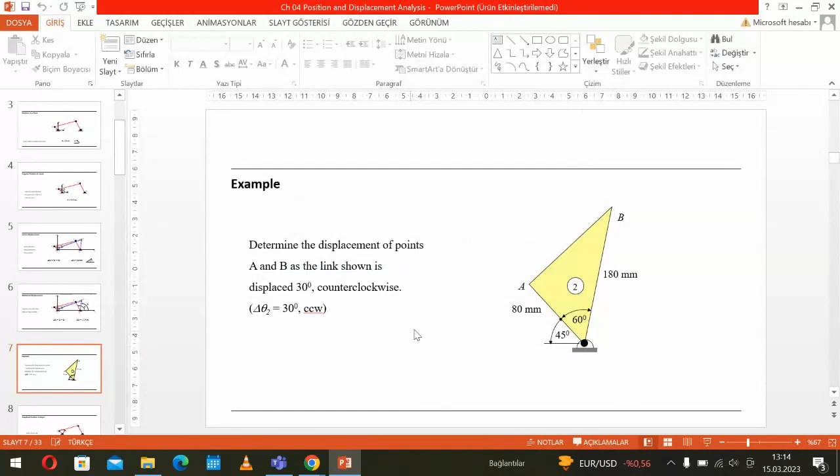So let's share the screen. Each lesson I give you some examples, like this one on the screen. For example, exercise 1, you have to solve it. Can you see that? Yes, I can see that. Yes, this is what I mean.

So should we submit this anywhere, or is it just practice? No, you do the homework, and at the end I will collect it from you. When will you collect it, hocam? Let's say before the end of the semester, one week before.

But you shouldn't wait till that time. I will collect and evaluate it. So will the homework just be all of the exercises? Well, I couldn't understand what you mean. Can you show the homeworks, or just this one?

This is not the only one, this is one of the examples. So one of the homeworks? Hocam, we mean if you can collect the questions or exercises and put them as a file in the course content, so we can access them.

Okay, but I will give you lesson by lesson, I'm preparing them. Yeah, that's what I mean, hocam. Every time we finish a lesson, you just upload the exercises regarding that lesson into the Blackboard platform maybe?

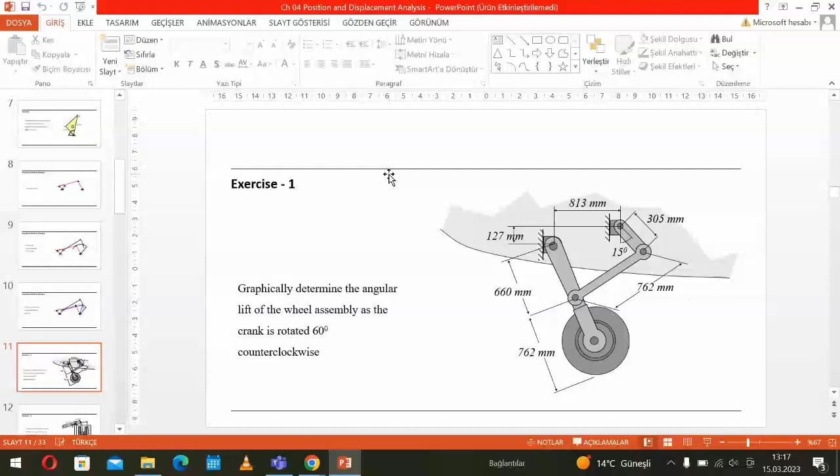Now let's continue from our last lesson. We talked about position and displacement regarding the mechanisms, so we are here on this page. Now we will learn how we can graphically define the requested position and the requested displacement.

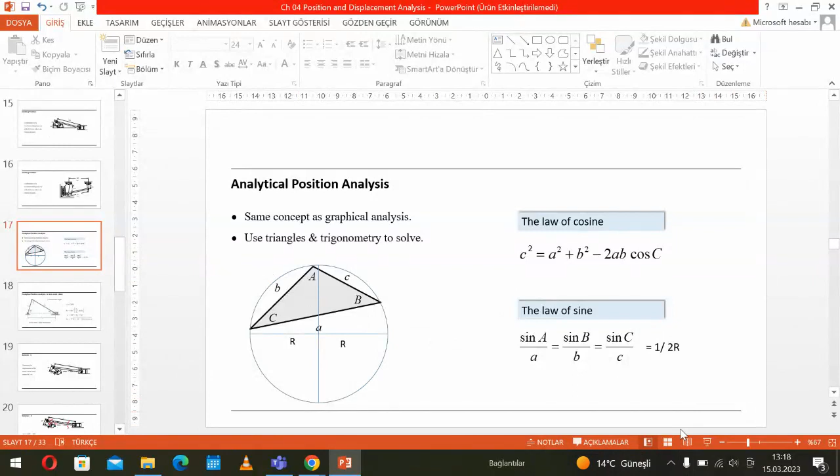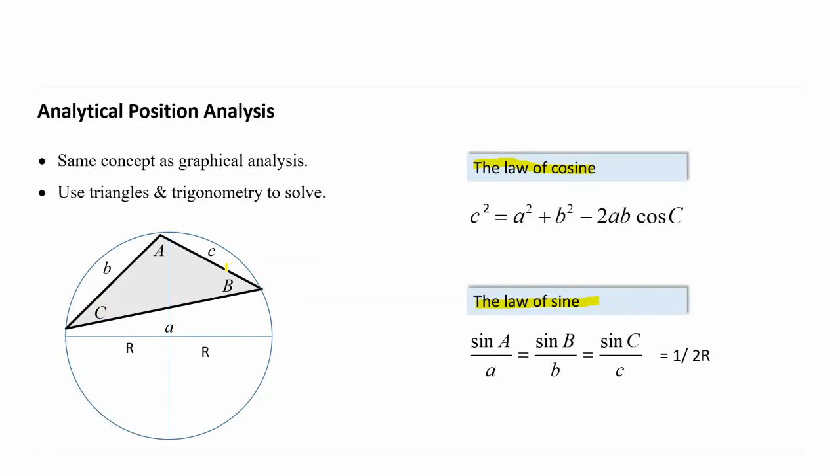Now we are going to use the analytical way. How can we calculate the position and displacement using the analytical method? Mainly we use two important laws: one is the law of cosine, and the other is the law of sine. Based on the geometry, you have the triangle ABC with its angles and lengths. We will use these equations for the analytical way of calculations.

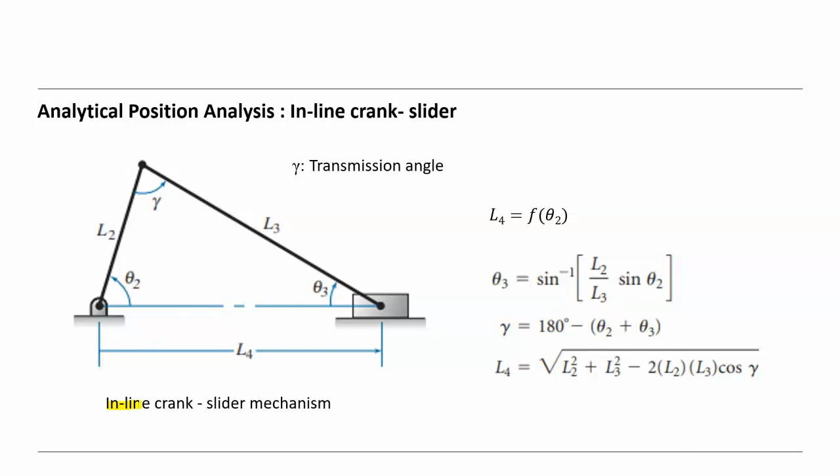Here we have an inline crank slider mechanism. That means those points are inline here. Let's say this is A, this is B, and this is C, the joint. A, B, C, and A and C are on the same line. That's what I mean by inline crank slider mechanism.

There is another type we will discuss in these lessons. So the analytical way means depending on this angle theta 2, I'm aiming to calculate any required position. In this calculation, what is known or given: L2 and L3 are given, but not L4, because L4 is changing depending on the position of C. Theta 2 must also be known, so we are going to calculate L4 as a function of theta 2.

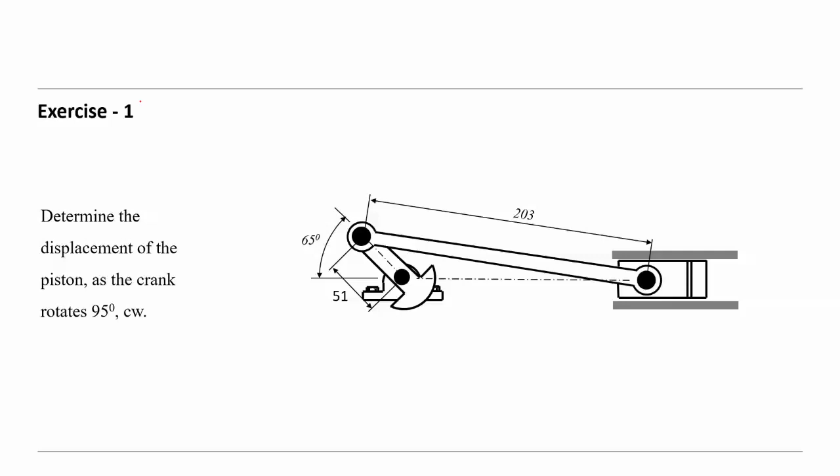So we have an exercise I will put today on the online platform. The question: determine the displacement of the piston as the crank rotates 95 degrees clockwise. That means clockwise in that direction. This is the initial position, with angle 65 degrees. So you turn 95 degrees in that direction, clockwise, and then calculate the position. So then you have all these.

You will do it. You can use two methods, but I need also the analytical way. You can calculate analytically using the analytical method, and you can also use the graphical method to draw it.

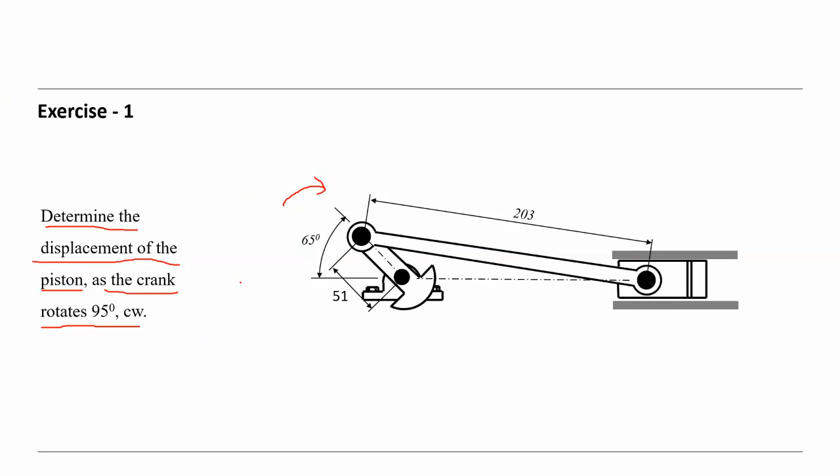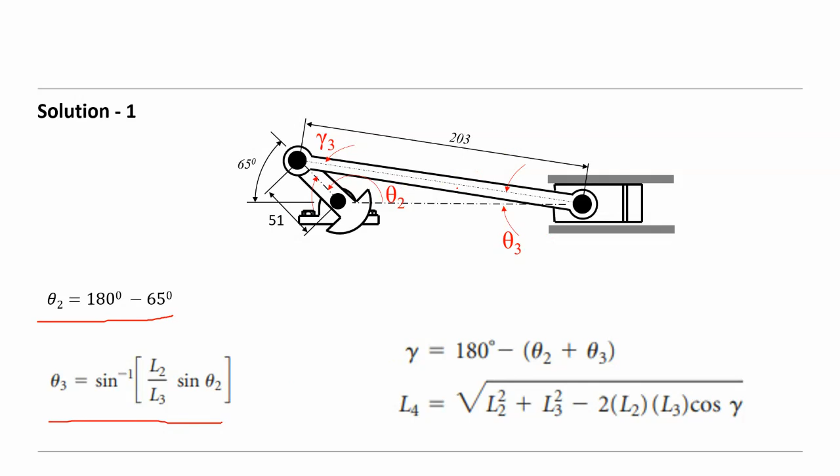Okay, another type. There's a small help here actually showing how you can calculate. You see theta2 is already here, can be calculated, and theta3 you can calculate, and gamma and L4 and so on. This is possible to calculate. It's shown there.

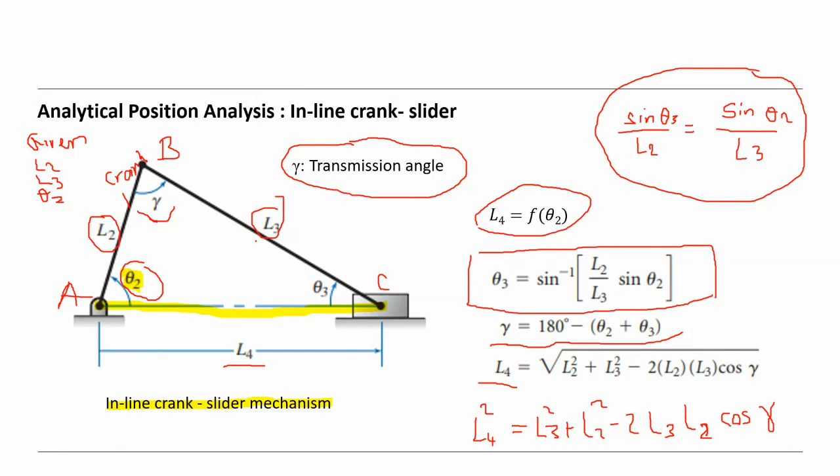So in some applications, this crank slider mechanism is used in that configuration, where the mechanism has an offset. It's an offset crank slider, so we have L1. That means we add one more parameter here, so to calculate it, one more parameter. Here we had only L2 and L3. We know also theta2 is given. So here we have also L1 additionally.

So how can we calculate now? Especially L4 has to be calculated, because if we know L4, the position of point C, we can calculate also the stroke here. So the slider takes... slider.

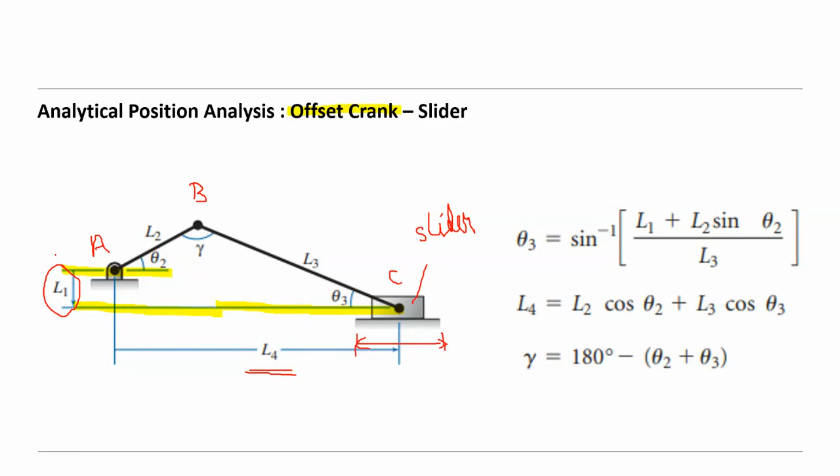So to calculate, first of all we need to calculate theta3. Theta2 is given already. So we can say given R, given L1, L2 is given. That means we know all the parameters. L3 is given, and theta2. Theta2 we need to drive the crank, to move the mechanism, to put the mechanism in action, for example. And what is the find here?

L4, and gamma, and theta 3. So 3 parameters. We have to write at least 3 equations to calculate these 3 parameters. And you see here there are 3 equations, and using these equations you can calculate all the parameters: theta 3, L4 and gamma.

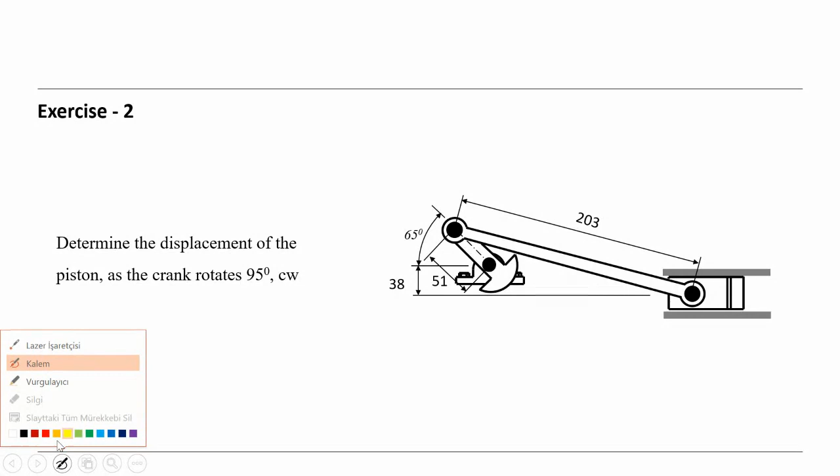And there is also another important mechanism, the 4-bar mechanism, often used in technique, and we will discuss this one, the crank rocker. I have an example here again, for this type of mechanism, offset crank slider, to make the calculation.

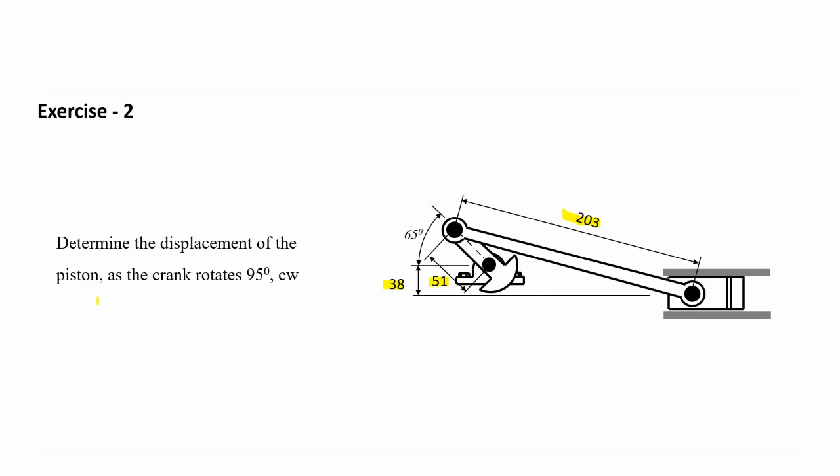You see here, this is L1, this is L3, and this is L2 here, and this is the position, again the mechanism used before, in that position. So we have to calculate, determine the displacement of the piston. This is the piston here - let's use another color - this is the piston here, so on.

So we have to calculate the position of the piston as the crank rotates 95 degrees, 95 degrees clockwise, that means in that direction.

So we also take into account the Grashof rules: smallest length plus longest length must be smaller than the others. Let's say P and Q - this is the smallest one. Mainly L2, the crank, should be the smallest one. L1 could be bigger, I mean this one. And the summation of L2 and L1 must be less than L3 and L4. Then we have this type of mechanism, crank rocker.

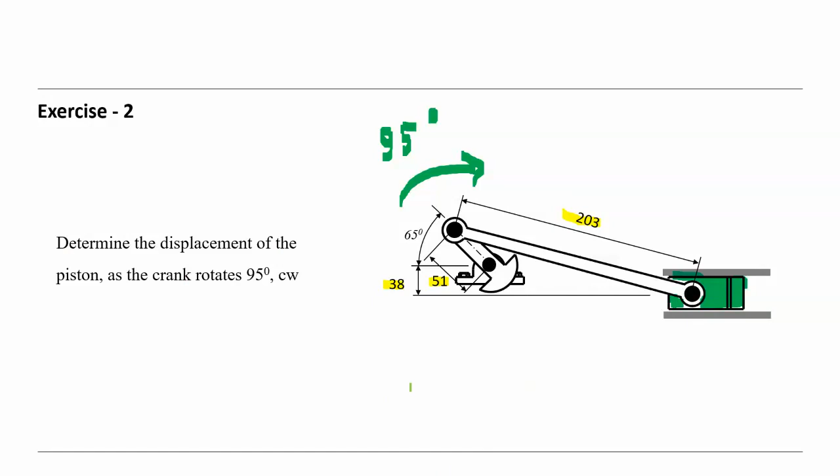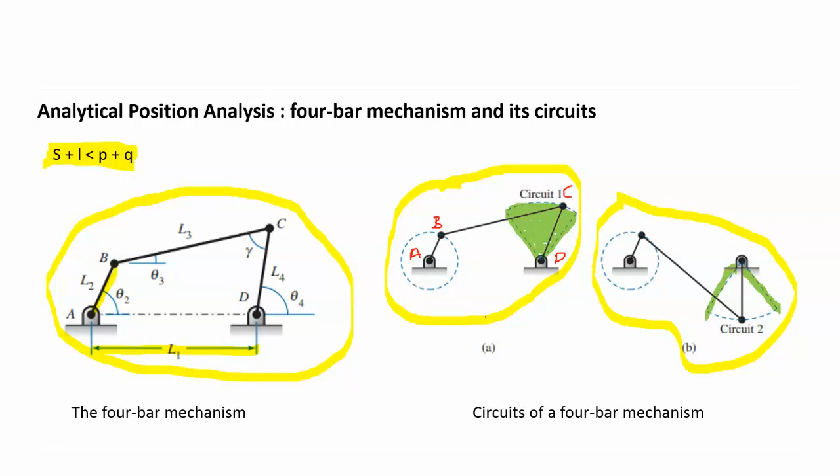So that means the motion of the rocker between this angle has to be calculated. You use this type of mechanism very frequently in technique, so if we need rotary motion in a certain angle. This is a rotary motion here - the member DC is executing a rotary motion under a certain angle. If we say the angle must be, let's say, 60 degrees, it must be designed accordingly.

In our next chapter we will discuss the synthesis - how can synthesis realize a mechanism coming from this angle, for example, or this type of mechanism in the circuit too. So this is the important parameter we have to calculate, the important values. So how can we calculate that?

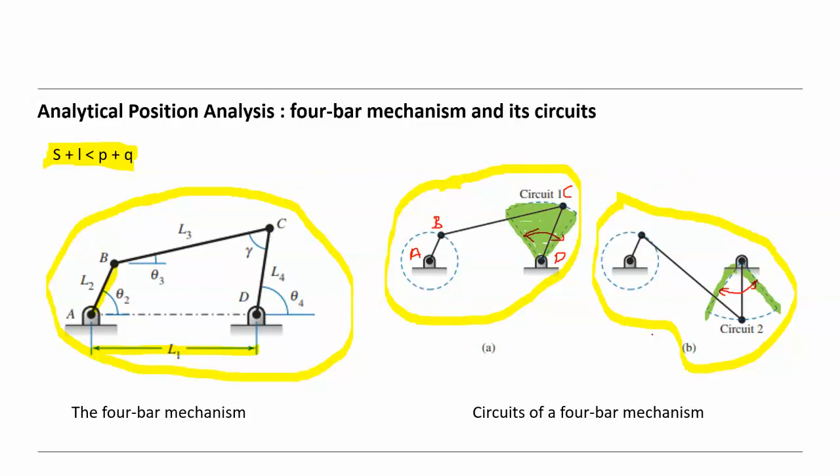The way of calculation, you see here, you have these equations. Again, using trigonometry we can calculate what is given. Let's talk about that first.

What is given? L1 is given and L2 is given. That means the type of mechanism and the dimensions are given: L1, L2, L3, and L4 are given, and also theta 2.

Always we need theta 2, because we use theta 2 to drive the mechanism. So we drive the mechanism using theta 2. This is the driver angle in counterclockwise or clockwise direction.

So what is to find? Any other expectations have to be found. For example, this angle is very important, as I said, since if it moves like so into this - you know, this is a circle here around the center of D. So let's say if we have such a motion, we have to calculate this angle.

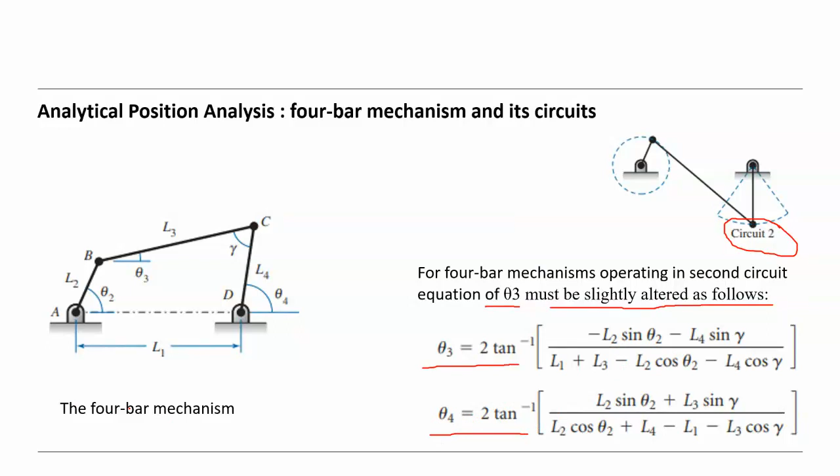So we calculate theta 3 accordingly, and then based on theta 3 we have to recalculate theta 4 also.

Another important thing - I said the angle, this gamma here. Gamma is the transmission angle. So you can imagine it in that way.

So then it moves in between, let's say, 40 and 100, 120, and so on. There's an ideal angle which has to be kept or realized for a good crank rocker mechanism, and therefore we need to calculate gamma min and gamma max. These gamma min and max values are important indicators for transmission of the force F from L3 to L4.

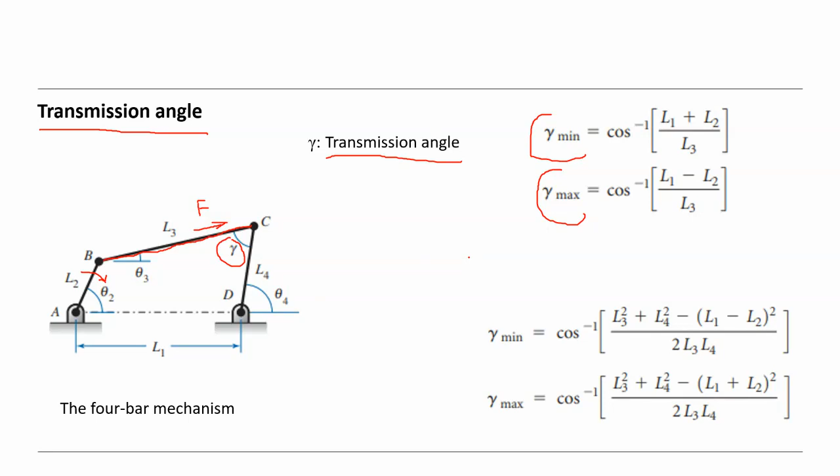Okay, so then we have an exercise here, one more. Exercise 3: determine the displacement of the 180 millimeter link. Where is it? The 180 millimeter link is this one.

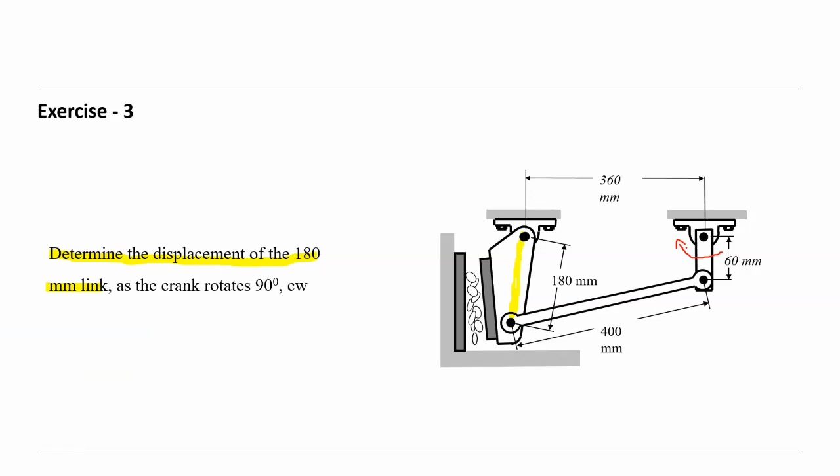Determine the displacement of the 180 millimeter link as the crank rotates 90 degrees clockwise. Where is the crank? The crank must be somewhere here. 90 degrees clockwise means here - 90 degrees in that direction, from this position.

So this has to be calculated, and also this angle has to be calculated - gamma. So I am writing here, and the transmission angle gamma has to be calculated.

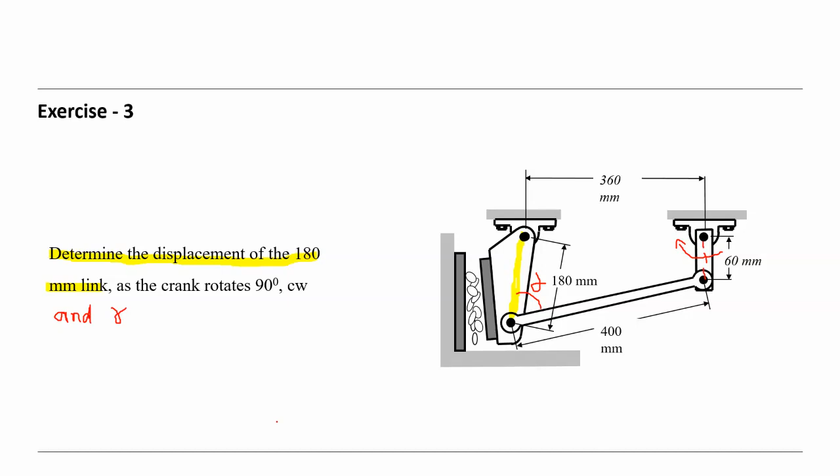Okay, so another topic that belongs to the analysis is the coordinates of any point on the coupler, a point on a floating link. This is our coupler, it is like a triangle. So any point on this coupler could be interesting, and we need to calculate the coordinates.

In this example, let's say the coordinate of x here. So this is the position, we have to calculate the position, that means the coordinates of x. Graphically it is not a big problem because we know everything here, that means all the dimensions are known. We are talking about the analysis, and therefore we know all the parameters of these mechanisms.

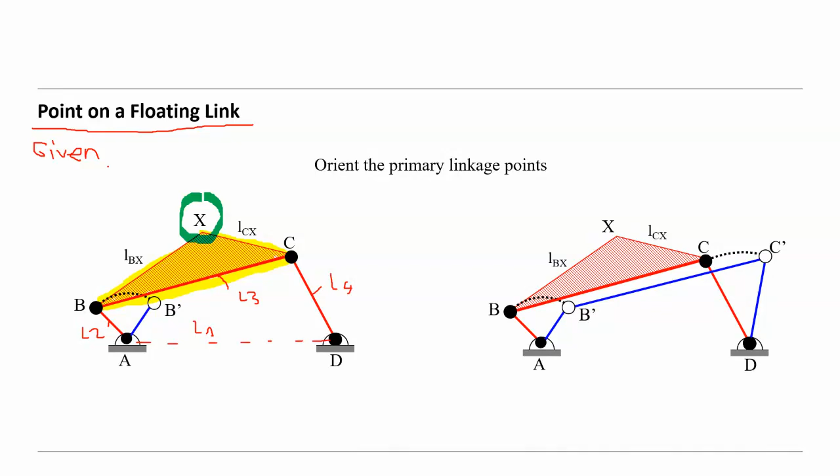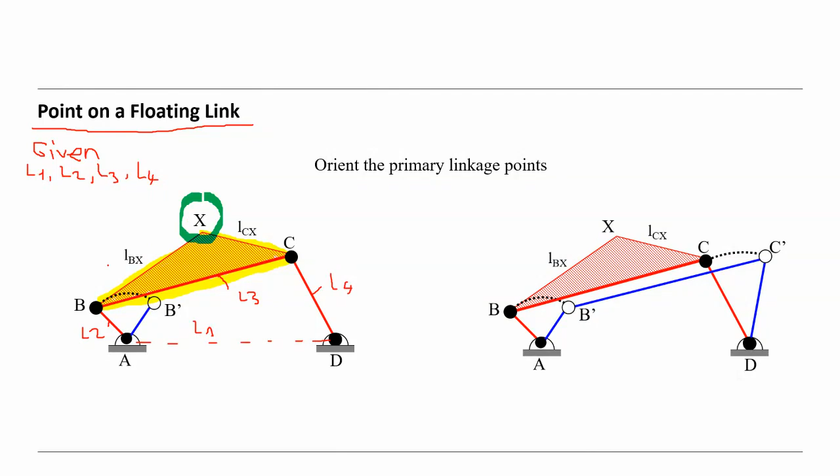Like we can say, given what is given here, givens are, for example, this L2 is given, and here L3, L4, and this is here L1. L1 is given. So given are L1, L2, L3, and L4. So also we should know LBX and LCX. Those must be also known in order to know the position of point x.

But since it is a triangle, these angles must be also known, and based on this angle we can easily calculate them.

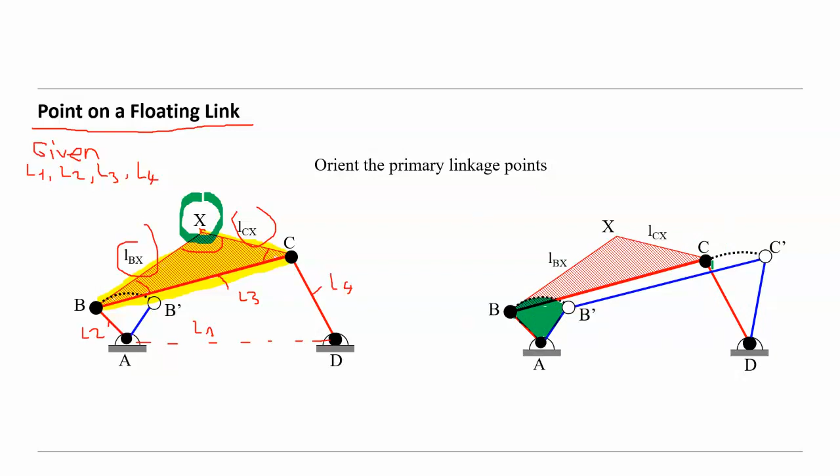If the point B changes, the position of AB changes from AB to AB prime. So let's say with those angles here, we learned already in our previous example, also the rocker is also changing its position, that means C moves from DC to DC prime.

We discussed this in our previous example. Now the problem is, how can we calculate the position of x? The calculation of x, to orient the primary linkage points. For that, graphically we can easily find the position of x. If we turn with those angles, say counterclockwise, and here also clockwise, this x moves from this position to this position.

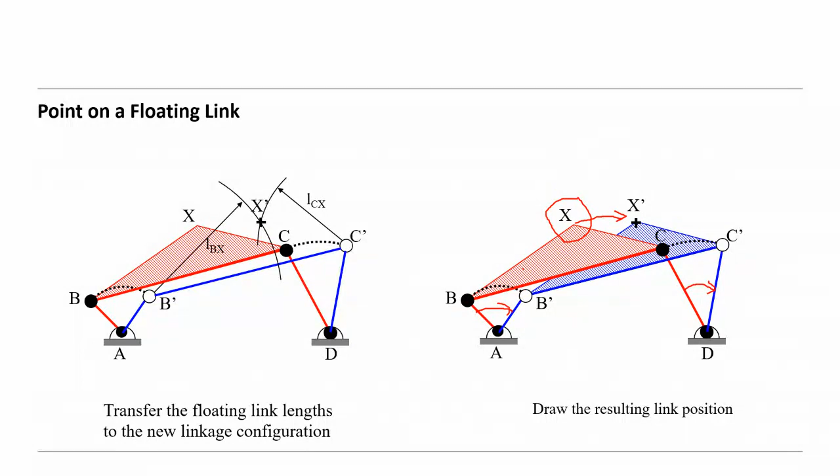So graphically it's not a problem. Using the compass and ruler and so on, and also the protractor, we can easily show it by drawing. But how can we calculate the position of x or any point on this coupler? Any point on this coupler could be interesting.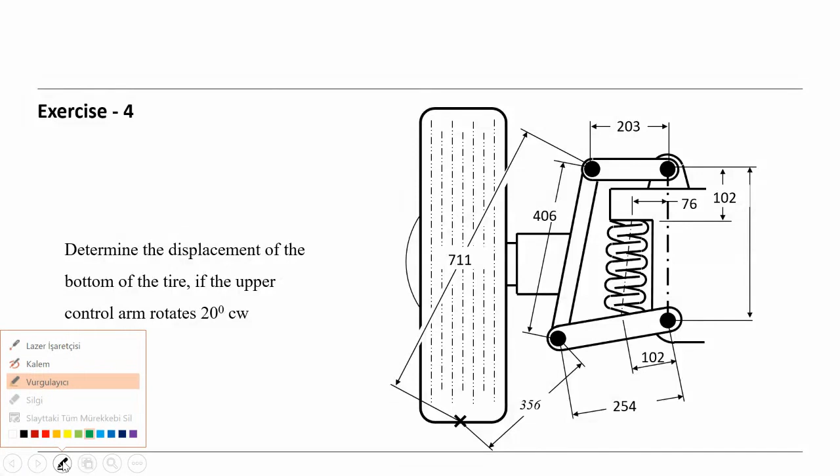For that, we have an exercise, and the exercise requested is to determine the displacement of the bottom of the tire. You see the car mechanism where we assemble the tires to the car here. This is a 4-bar mechanism, you can see it easily here.

This mechanism is a very interesting topic in mechanical engineering, because nearly all the machines, all the equipment, has different mechanisms. You see here the interesting applications, and we have here a spring.

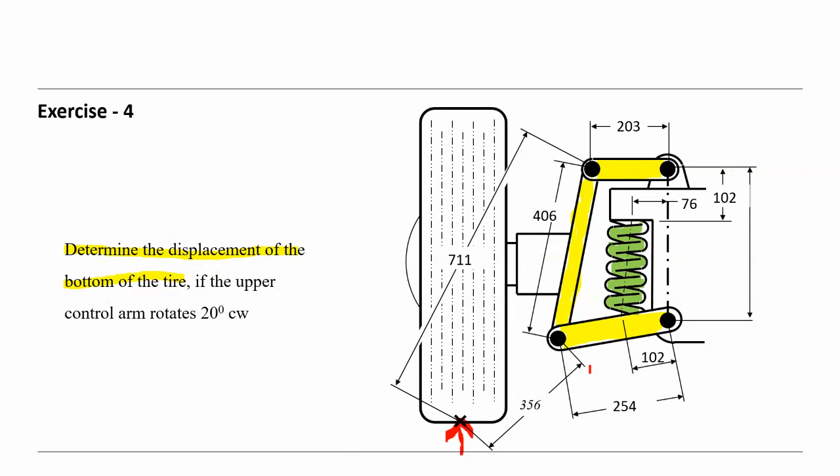We drive it by the spring. So you can imagine by driving the car, if we have a force like this somewhere here, or let's say it is going up and down, because of the spring, this energy pendling up and down can be absorbed by the spring, but it needs such a mechanism to connect to the car, the tire. So this is a four-bar mechanism.

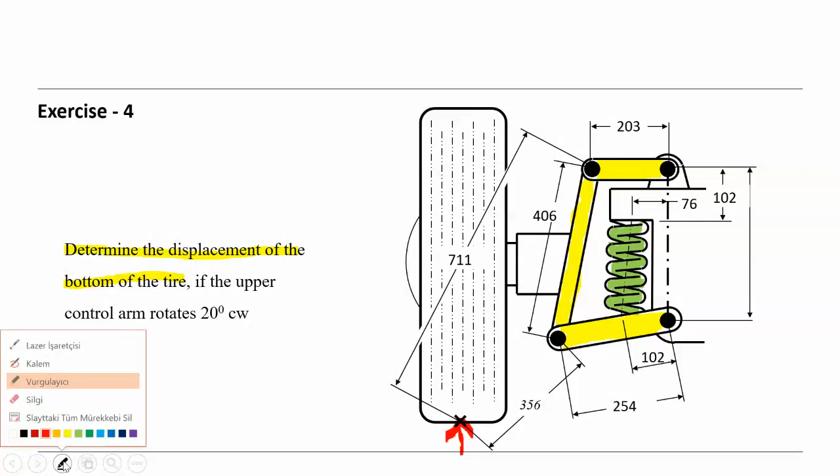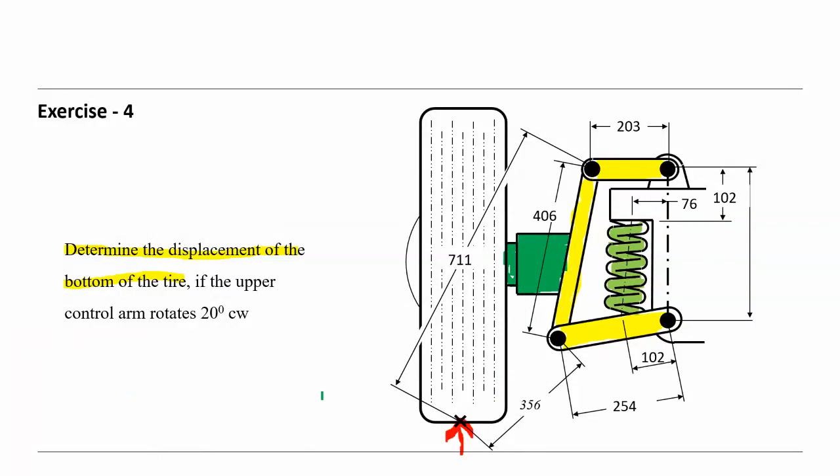Those are the grounded points here, and this is moving. So you see on the coupler, the tire is connected to the coupler, like this here, this is the tire connected to the coupler. That means the motion of the coupler is very important, especially this part on the coupler. And also it is extended to this point, so this is a point on the coupler.

So the question is, if the upper control arm, this one, rotates 20 degrees clockwise in that direction, what is the position of point x here? How can we calculate the position? Is it interesting? Yes, it is interesting and important also.

Because the position and also the path of this point, does it move vertically, up and down, 100% vertical? Because you know the tire has to keep the street, so it shouldn't turn, it shouldn't change its position in that direction or in other directions.

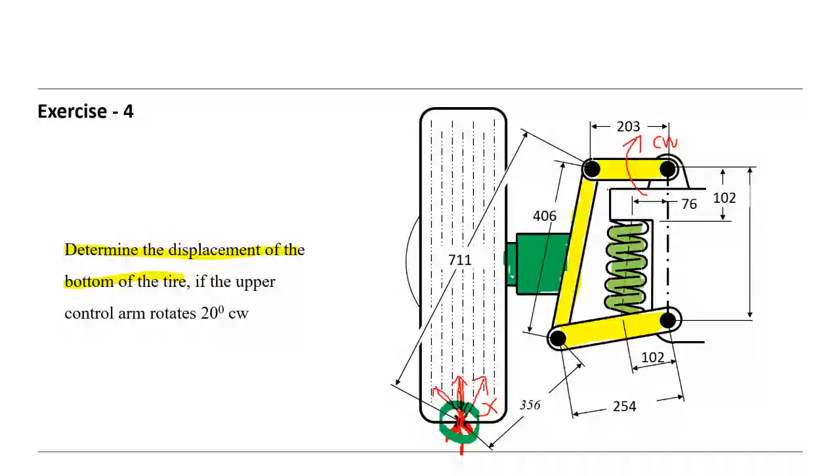So how can we design a mechanism that the position here, any points or the points on this tire, for a certain angle of this upper arm, upper control arm, undergoes a linear motion for a certain angle of upper arm. This is the art of calculation, that means to design such a mechanism.

Then if we talk about the design, this is analysis versus synthesis. This we discuss under the term of synthesis, that means we design a mechanism. So we expect from this mechanism that this point here, let's say on the coupler, undergoes a linear motion, at least not fully, but for a certain angle of the upper arm.

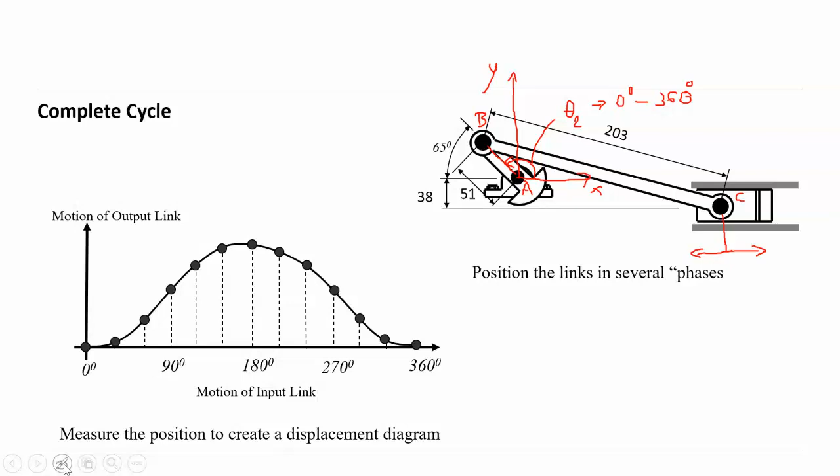C is moving in that direction, isn't it? I'm going to calculate the position of C, or the coordinates of C, based on the angle. This is the motion of the output link - let's say the motion of output link, and this is the output link here, the piston. Our piston is the output link, and the crank is the input link in that sense. This is the input link here. It has an extension here - I'll talk about why later.

So this is the input link. Let's write a column here: input link. And the yellow one is the output link.

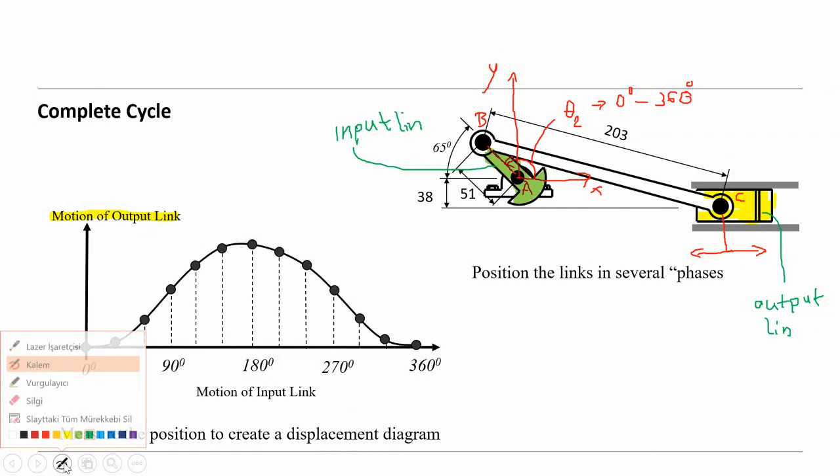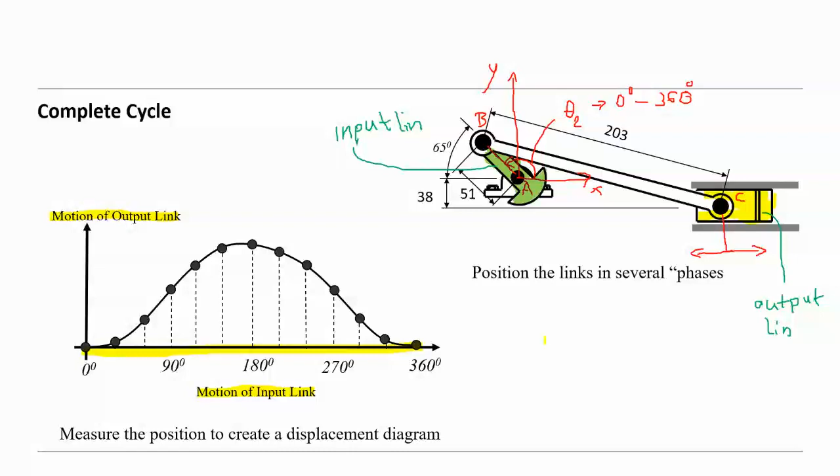So the input link moves - it undergoes a rotary motion, and this rotary motion is from 0, as you see, to 360 degrees. This is the motion here, from 0 to 360, that means one full cycle. So the motion of input link - let's let the input link run.

I made a mistake, sorry - this must be link, and this also output link. So then comes again here. Let's say these input links turn, one by one, 360 degrees from 0. And for each angle of the input link, I have to calculate the position of the point C.

And the position of C as a distance, I'm going to indicate on the y-axis. This is the x-axis showing the angle, the driver angle of the input link, and this is the y-axis showing the position of the output link here.

And you will see - you should do that, I mean as an exercise I will give you an exercise. So you will do that and you will see that for each angle here, you have a position, and here for each angle, you calculate a distance.

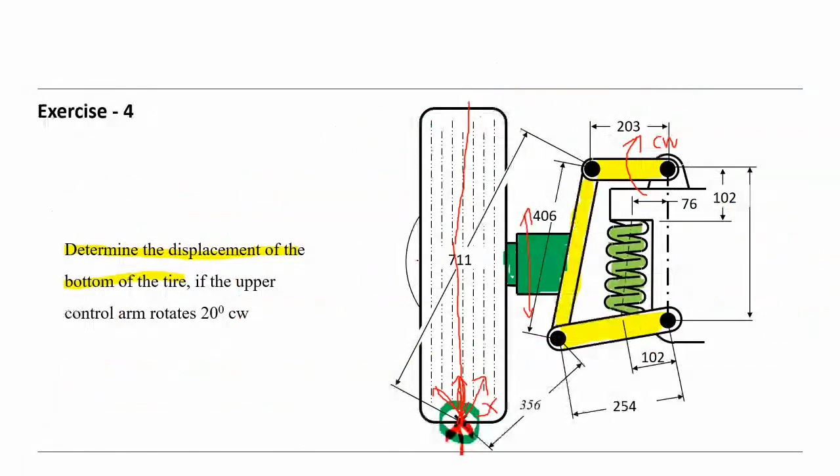That means L4. We discussed already L4. Here. L4 is a function of theta 2 and also theta 3, but theta 3 is also a function of theta 2. So that means L4 is a function of theta 2, because we changed theta 2, and depending on theta 2, we calculate the L4.

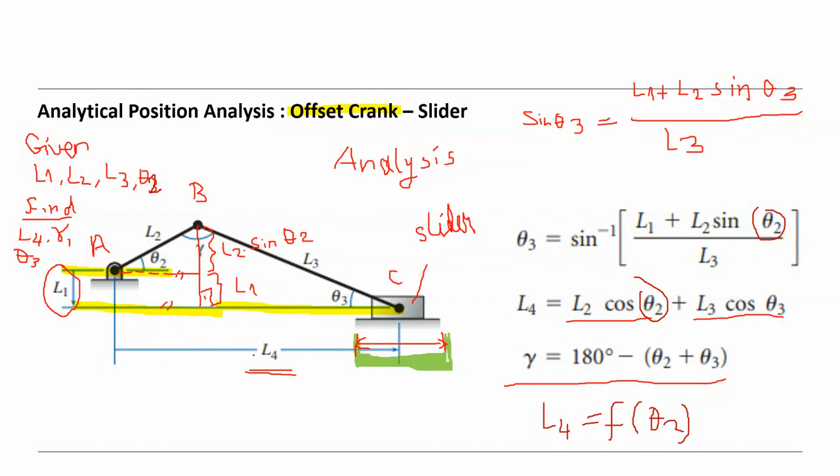So L1, L2, L3, theta 2, this is wrong. It must be theta 2 here. L1, L2, L3, theta 2 given, and L4, gamma, theta 3 has to be calculated based on these given. So L4 is a function of theta 2. Theta 2 is the independent variable. L4 is the dependent variable, like we are discussing here.

So here S is a function, independent variable, dependent variable, and depends on theta 2. And theta 2 is the angle of the input link, the driving angle of the input link. So this we call the transfer function.

Transfer function. So what means transfer function? Transfer function means the curve of the output link, or the curve part of the output link undergoes, depending on the driving angle theta 2.

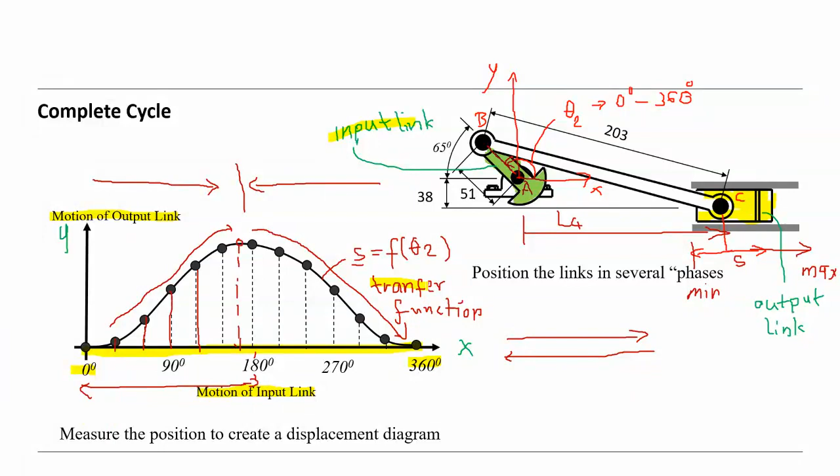And it depends on the geometry of the mechanism, like L1, L2, L3, and so on. This curve is changing, so you can achieve a different curve if you change the diameter or dimension of the mechanism. So this is also important information for us. This is the displacement curve, based on the angle of the input link. So we can calculate the velocity and the acceleration using this curve or using these facilities. So you can say the transfer function, or the displacement diagram.

So still we are busy with the position and displacement. But why are we discussing so much the displacement and position? Because our interest is actually velocity and acceleration. This is our target, to calculate the velocity and acceleration, to design a mechanism, to define the dimensions of a mechanism for given applications. But on the other side, it's also important to calculate the velocity and acceleration for the further steps. So therefore, first we learn the mechanism, which type of mechanism we apply most frequently in machine design or machinery, and the position and displacement, and then we will come to the velocity and acceleration.

So then, okay, so we calculate the position, let's say the point C here, motion of the output link. But it could be also like this. We have a 4-bar mechanism, and we will talk about coupler curves.

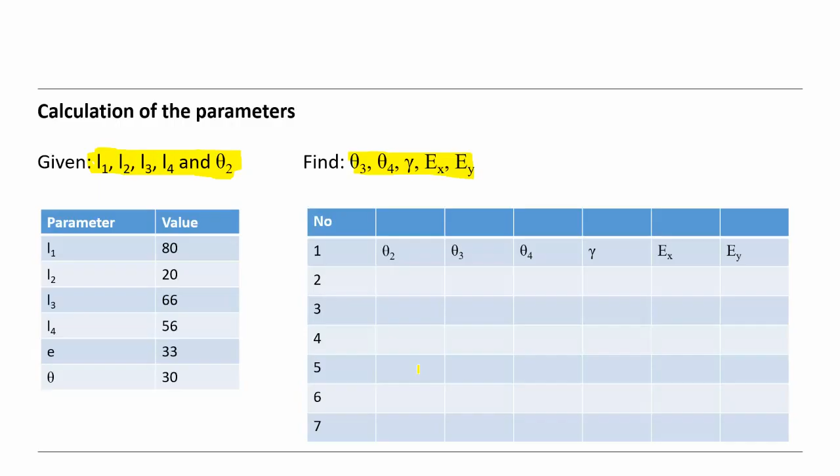So then I did an example. Is it here?

So you can create an Excel table like this. What is given here: L1, L2, L3, L4, and E, the eccentricity, and theta 2, and BD is the parameter we calculated here. You see that, where is it here? This one here, the BD, you see.

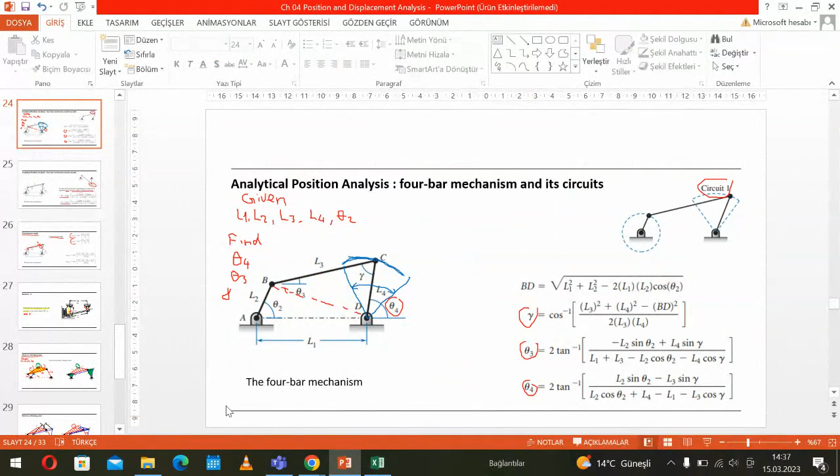Okay, then gamma, transmission angle, and then theta 3 and theta 4, EX and EY. So you write the formula here, you see the formula. How can we calculate theta 3 or 4, and how we can calculate EX, and so on. At the end, you have all the coordinates of E, EX and EY.

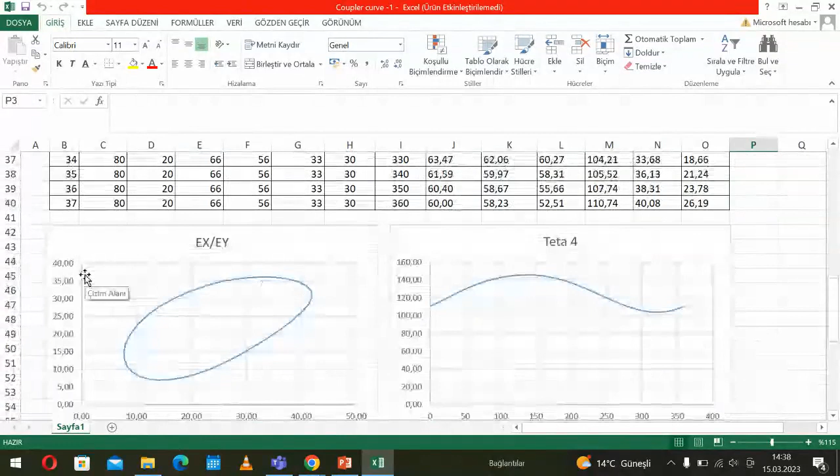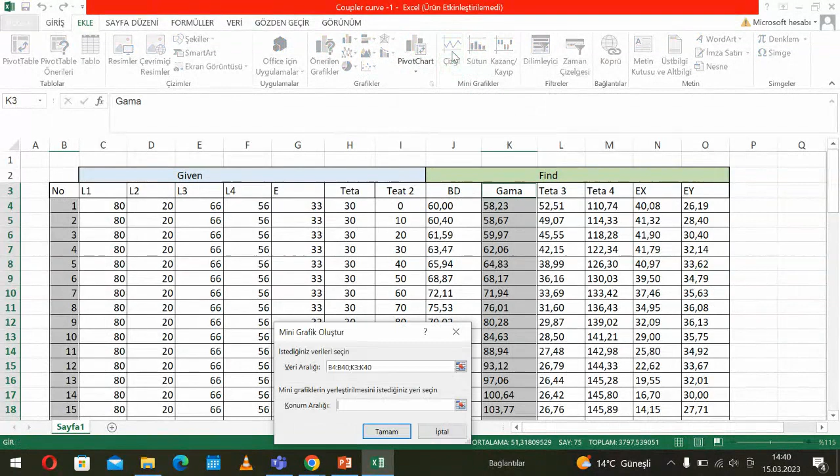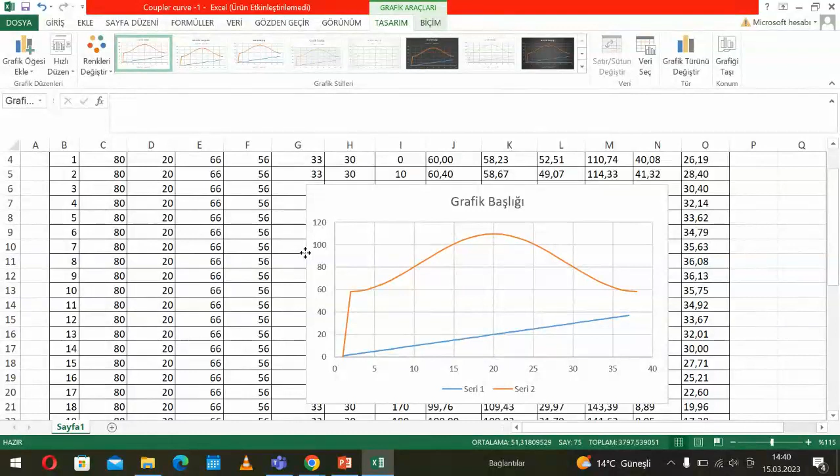So that means the angle gamma is changing in between. Notice something is wrong.

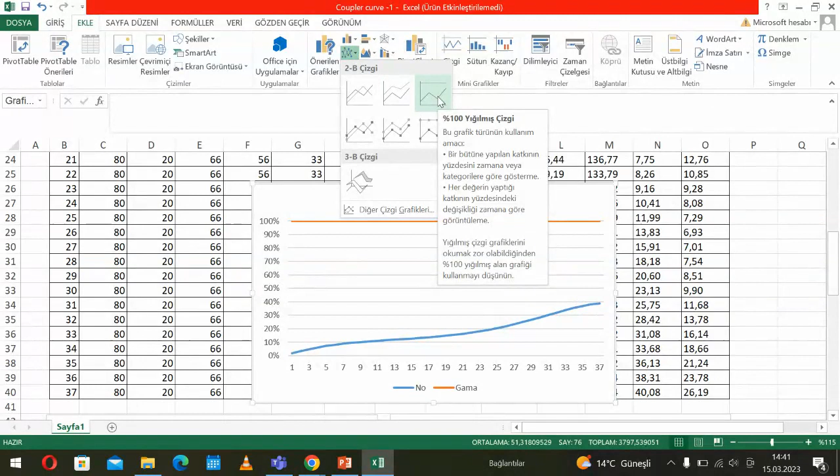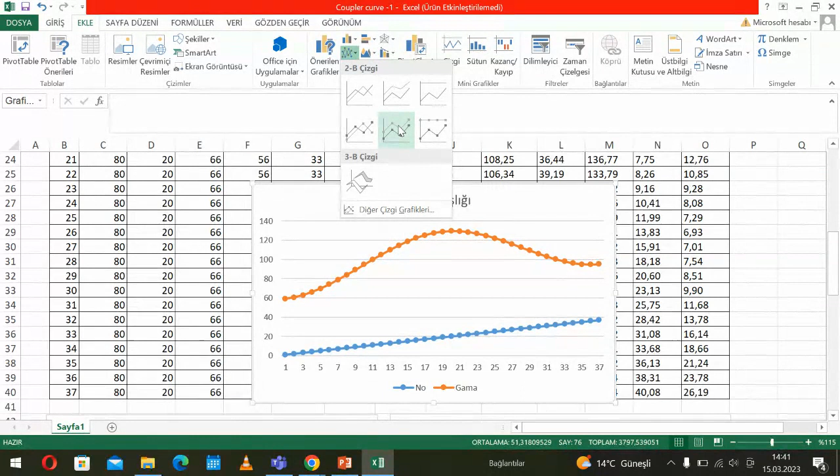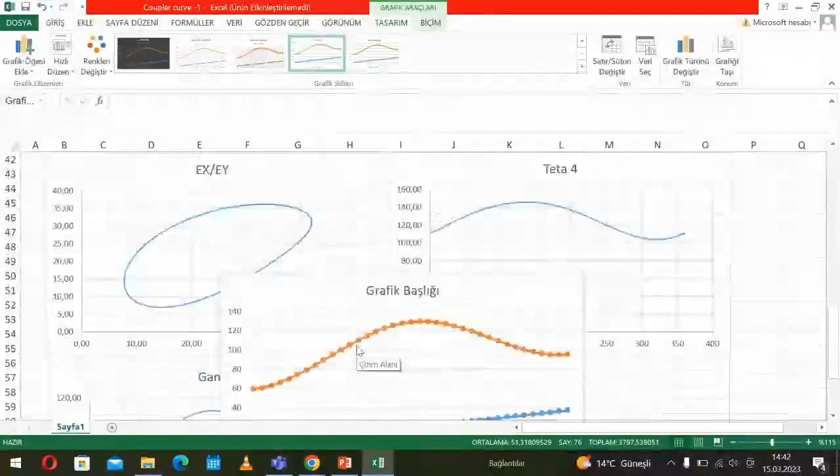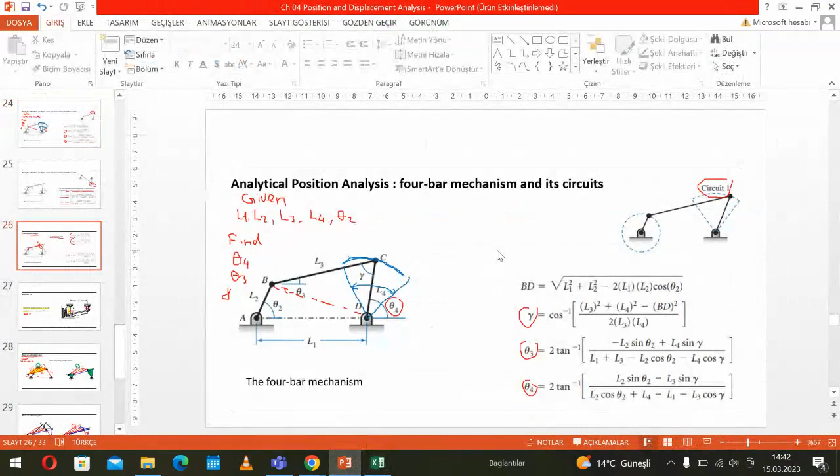Okay, let's use this one. And you see here the coordinates of the curve described by EX and EY. That means the curve undergoes the point here. Point E, sorry, the curve, the point E undergoes. Where is it? Okay, here is the curve.

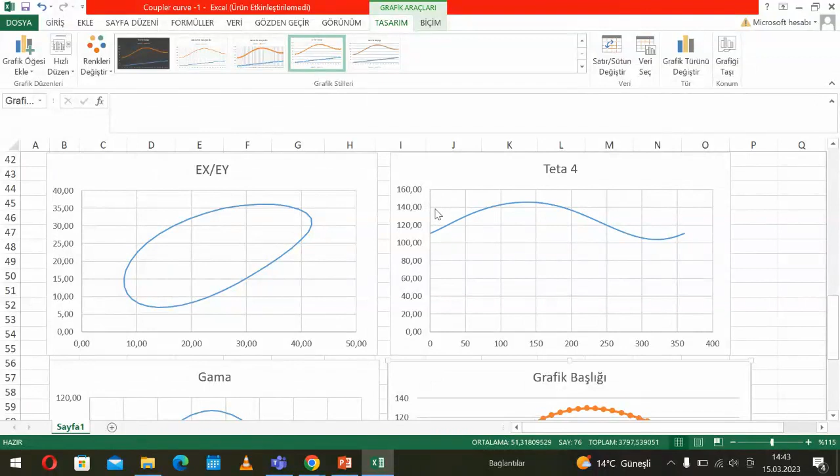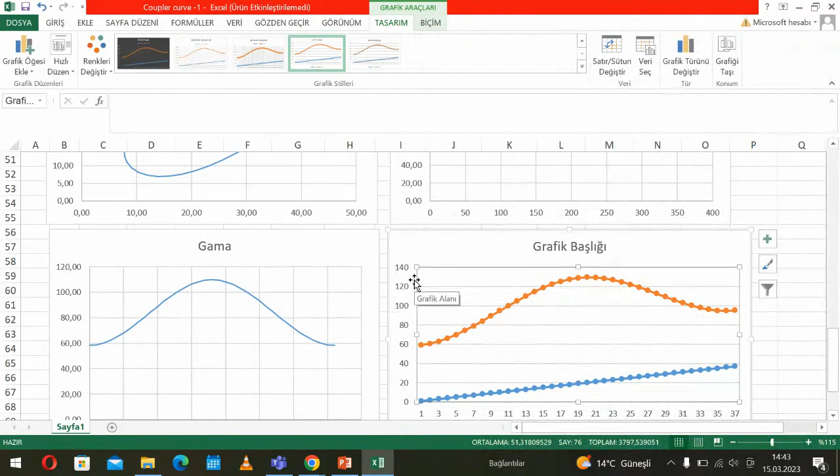And this is the angle theta, changing between, let's say, 100 and 140, 45, maybe. And here we have the gamma we had already, sorry, take it out. So gamma we had. Let's take it out, okay, we had already. The gamma, this is the angle, the transmission angle, over the x-axis.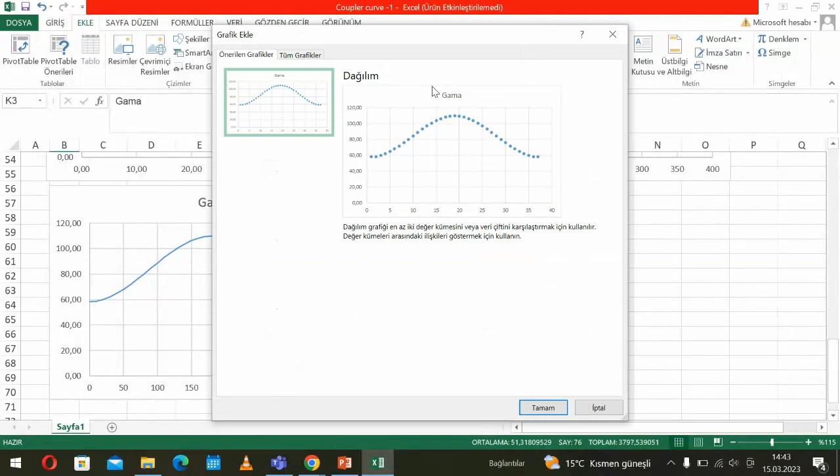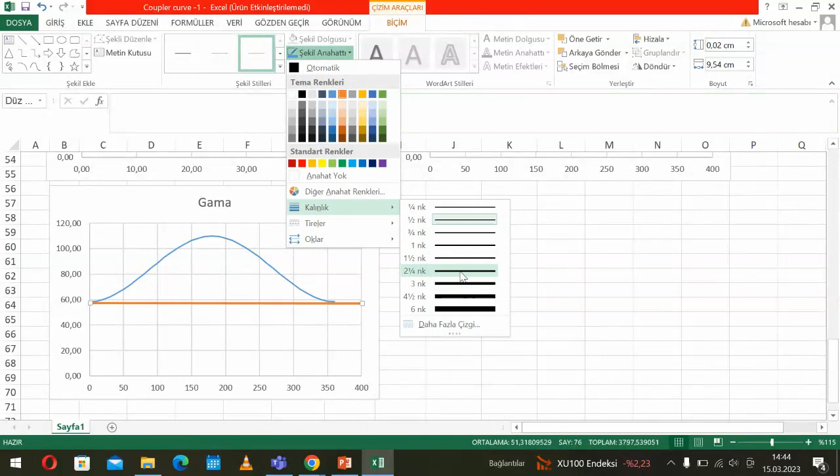So you see it moves between 60 and 110. Between 60 and 110 we can use a line. Okay, here, if we use this line here, nearly 60 degrees, or 90, let's say 90, 95.

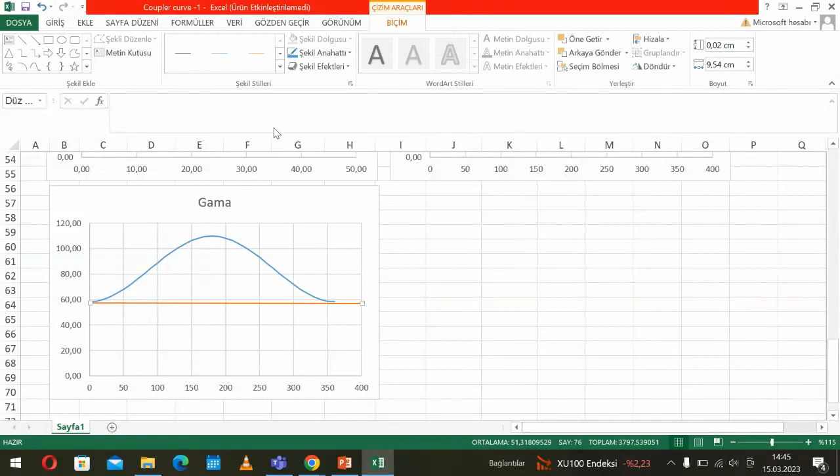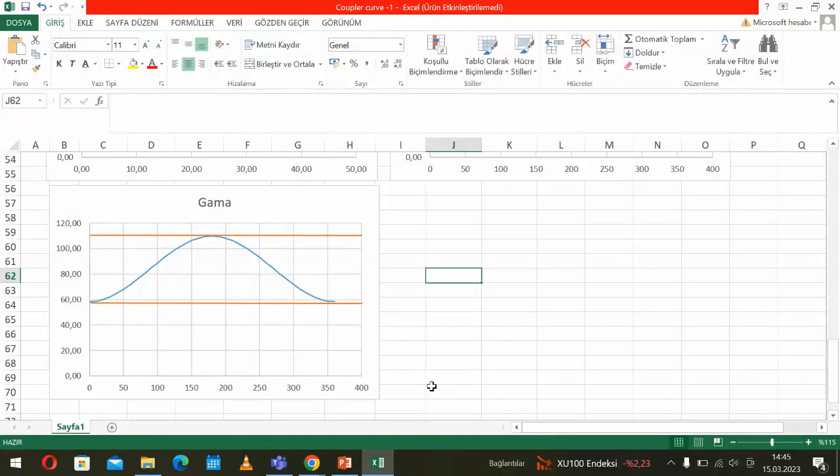Till here, so the 100, around 112 or 115 and so on. We can see from the table that the transmission angle is changing in between. We will see later what should be the limits of transmission angle for a good transmission. That means you can calculate what is necessary based on these given here, and you can make analysis and calculate any other parameter you need for the mechanism.

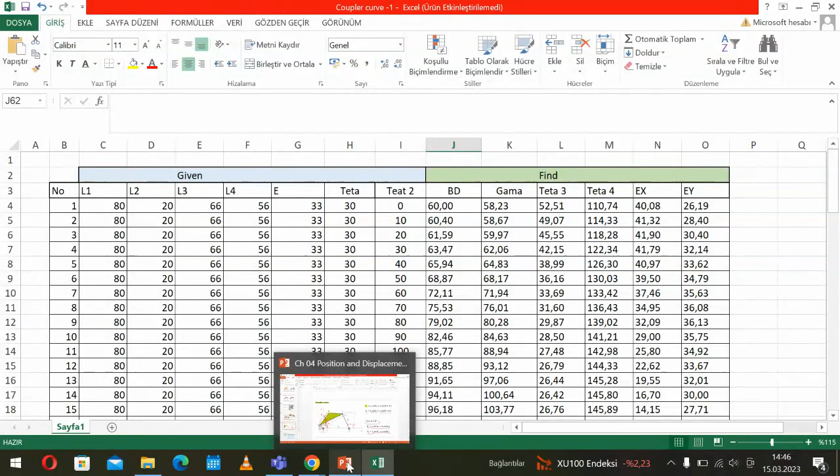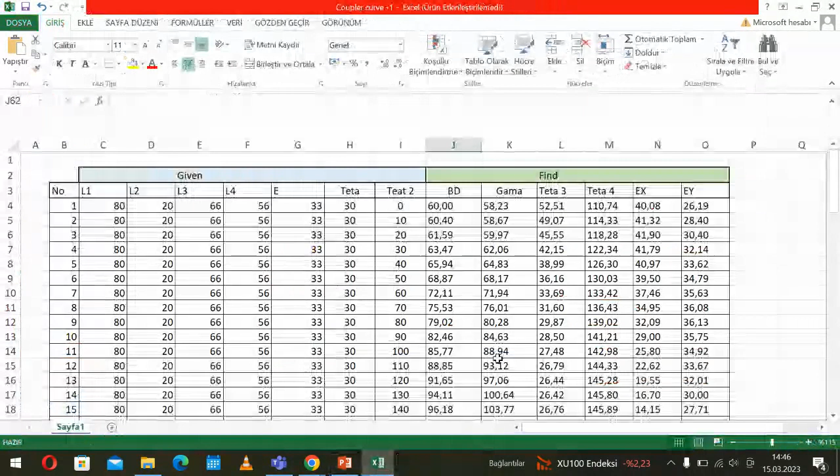So theta 4, where is it? Theta 4 is this angle, the angle we use for the oscillation, and we need for the oscillation. Theta 4, do we have somewhere here? It is here, you see it moves between these two.

We can use this line again. Copy, okay, let's copy that and put here. So it is changing in between, let's say between 101 and 140, 45, and so on.

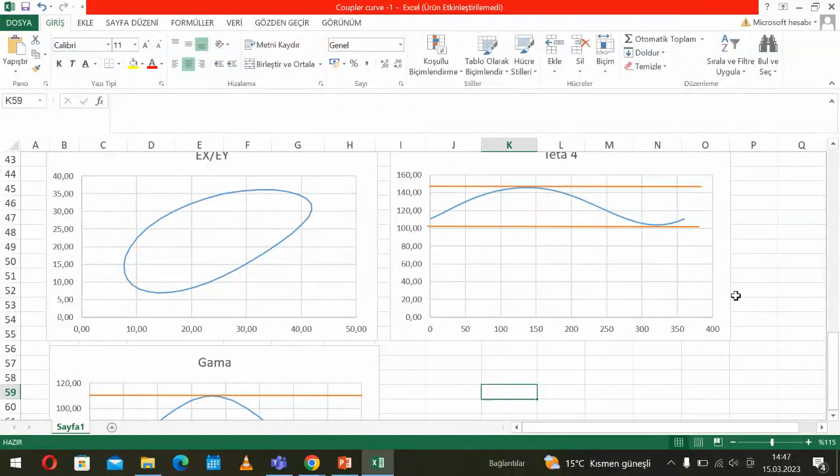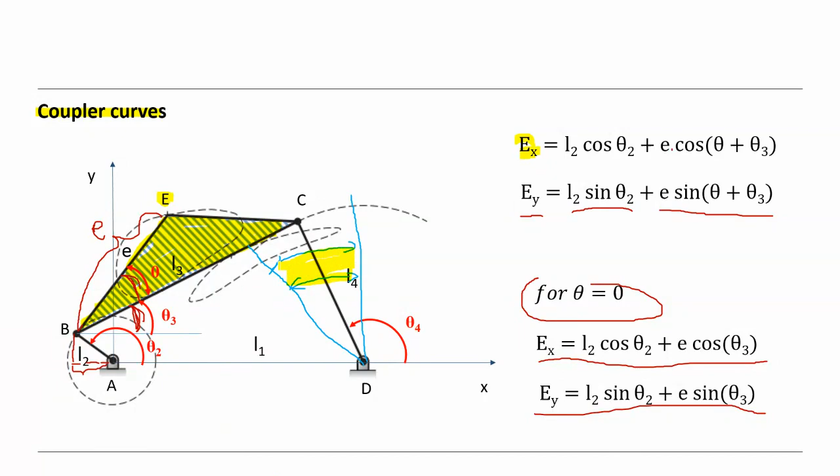Of course this is another example. So in between, our rocker moves. This is the angle we use to create the oscillation by the link DC. So this angle, if we need a different angular motion in between, then we have to redesign the mechanism. That means we have to change the dimensions of the mechanism in order to achieve a different angle here, and that we will learn in the synthesis.

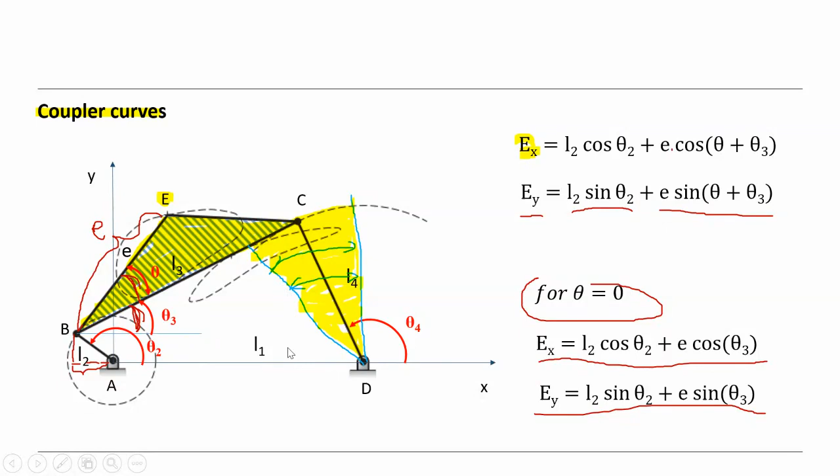Okay, we came to the end of these lessons. We will start a new topic next week. I will suggest that we start with synthesis next week. That means we are going to discuss how we can design a mechanism, how we can define the parameters like L1, L2, L3, and so on, so that we create the desired or requested angle, the motion, or like in this mechanism, the stroke. So how can we achieve the given stroke by designing the mechanism, by making synthesis.